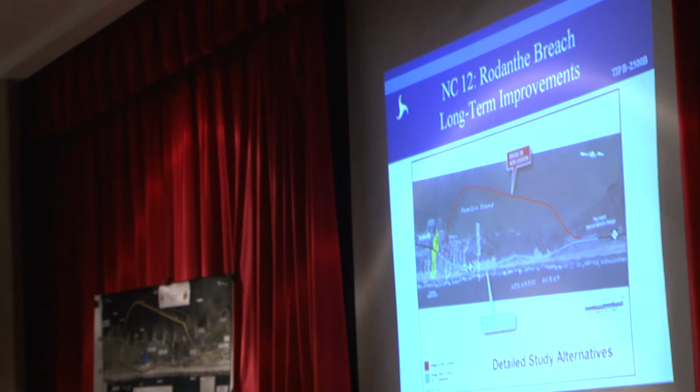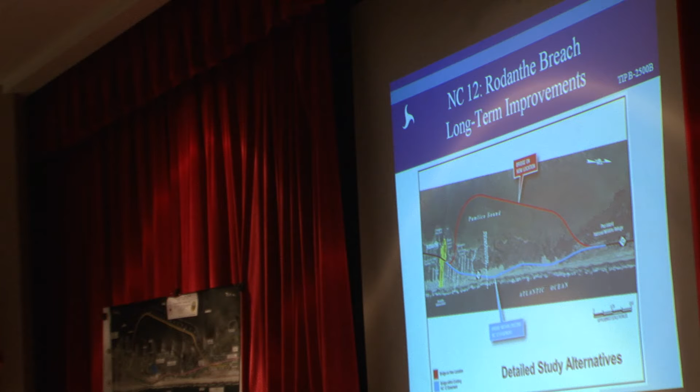As I mentioned, we're here for the Rodanthe breach portion of the Bonner Bridge project. This is phase 2B. Phase 1 is the Bonner Bridge itself. Phase 2A is the Pea Island breach area near the temporary bridge, and we had a hearing on that last year, March, springtime, early springtime period. Today we're going to talk about the breach area in the Rodanthe area.

I'm going to sort of follow through the order of your handout so you can follow along a little bit, but again, I'm not going to read it verbatim. I'll give you all a chance to do that at your leisure.

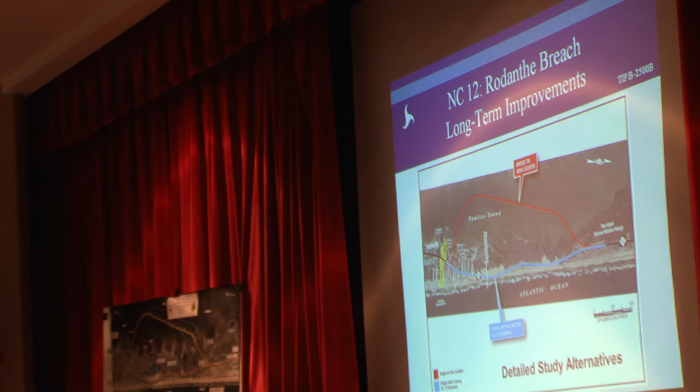As I mentioned earlier, we had informal open houses earlier today in Rodanthe. We had one yesterday in Ocracoke, and we'll have another one just prior to our formal hearing in Manteo. So if you'd like to come out for that, or if somebody misses it, send a neighbor or a friend. And then of course the formal presentation and formal hearing is tonight.

The same information is being presented at all of these meetings, so no one's hearing anything differently tonight than they heard yesterday, or will hear tomorrow. And for those folks who aren't comfortable coming up and speaking, everything carries the same weight. If you send me an email, however you get your comments to me, we look at all those equally. So don't feel like if you're not comfortable speaking that your voice is not going to be heard.

So the purpose of tonight's hearing is to receive your comments and concerns on this project. That's really why we're here. I'll talk for a few minutes, but really the important thing is to hear from you. DOT released an environmental assessment. That's a document.

That's an environmental study, a document that we just completed. In addition to comments on the project, we're asking for comments on that environmental assessment. It documents the studies we've done on the project and the decisions we've made up to this point.

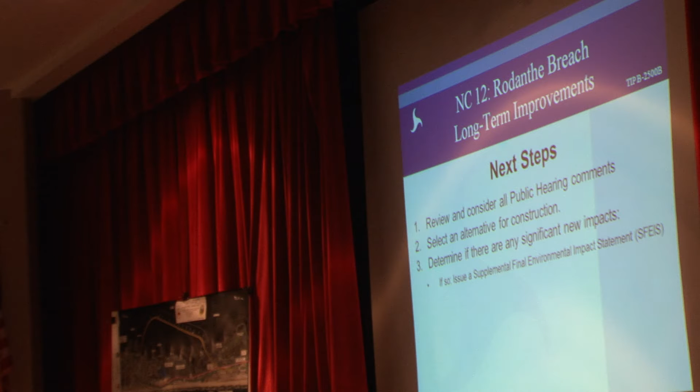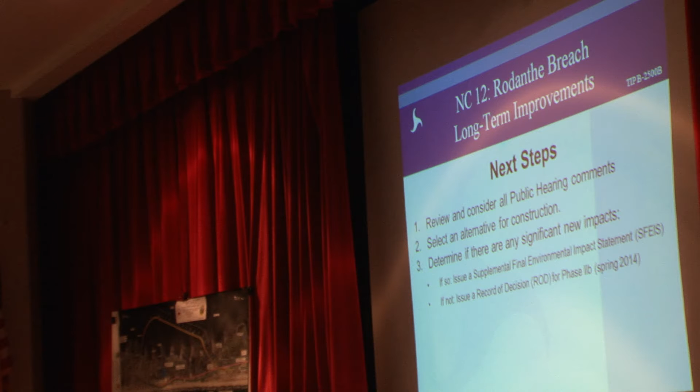If there are significant new impacts, then we'll do a supplemental final EIS—just another environmental document, another part of the studies that we do. If there are no new significant impacts, then we will issue a new record of decision for the project, and then we'll award a design build construction contract. Right now we're looking at late spring 2014.

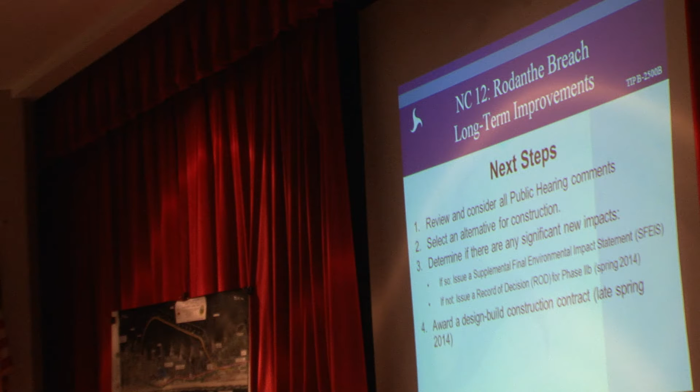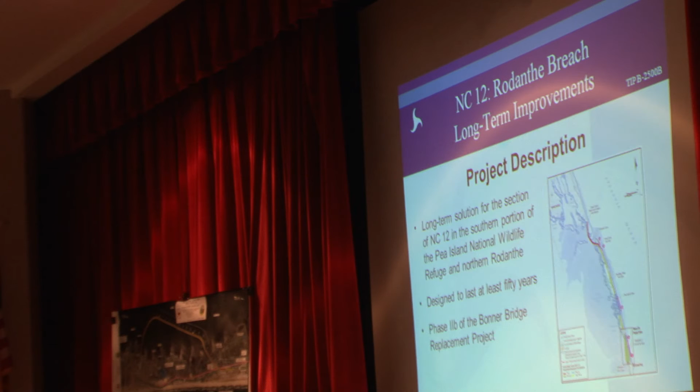So, a little bit about the project: it is the long-term solution for the section of NC 12 in the southern portion of the Pea Island National Wildlife Refuge and northern Rodanthe. It's designed to last at least 50 years, and as I mentioned earlier, it's phase 2B of the Bonner Bridge project. These are the two study alternatives that we have.

I'll cover some of the other options we looked at, but these are the two that went through detailed study. We have the bridge on new location, which starts north of Rodanthe in the Pea Island Wildlife Refuge and goes into the Sound and then ties in at Rodanthe. The other option is the bridge within the existing NC 12 easement, which generally follows the existing road.

It's within the existing easement—it won't be exactly where the road is, but generally will follow the existing road through and into Rodanthe. Both of these are bridges, so everything you see here is on a bridge: either a bridge along the existing easement, or a bridge in the Sound.

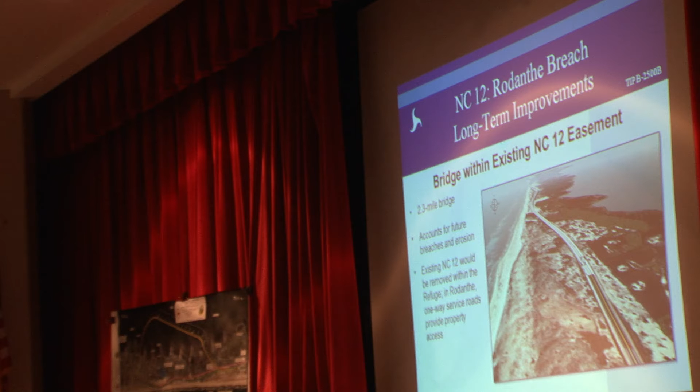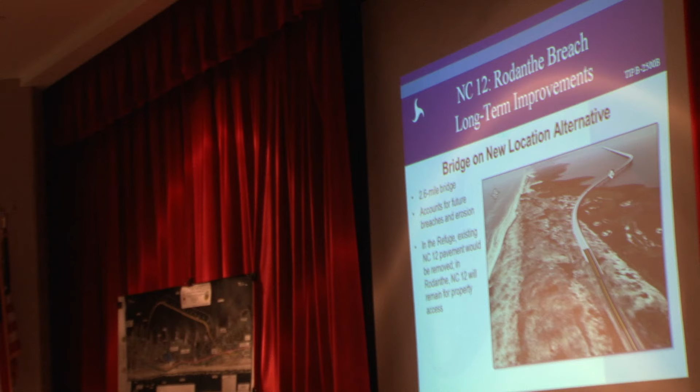With both alternatives, in Rodanthe NC 12 will remain for property access. So the portions of the road in Rodanthe will stay to access the properties, and then once you get into the refuge, all of that will be removed up to the new bridge. And again, we'll maintain traffic during construction.

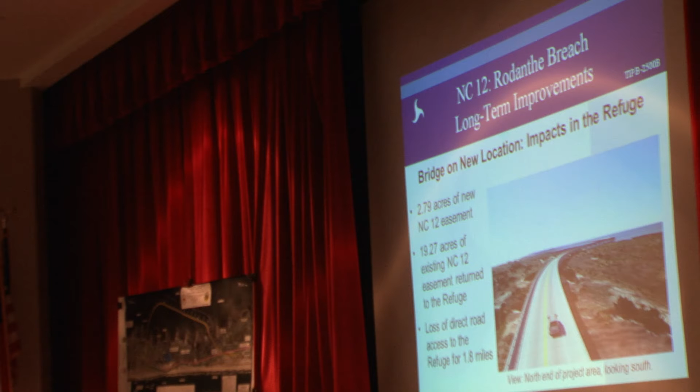Impacts in the refuge would be 2.79 acres of new easement needed, and 19.27 acres of existing NC-12 easement would be returned to the refuge. So there's sort of a net gain for the refuge with this alternative. And then loss of direct road access to the refuge for 1.8 miles—we wouldn't have the road through that area anymore, as I mentioned earlier.

Now, the preferred alternative, DOT's preferred alternative, is the bridge within existing NC-12 easement. Again, that's DOT's preferred alternative, but we want to hear from you today what your opinion is. Some of the reasoning behind that is that there's no new permanent NC-12 easement in the refuge—NC DOT already has that easement. It also avoids impacts to Pamlico Sound.

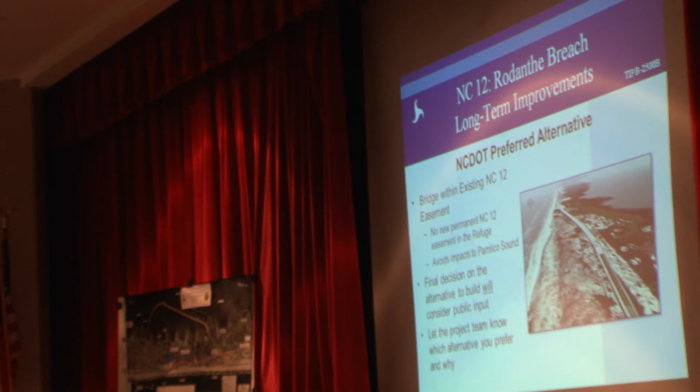But the final decision on the alternative will consider public input. So we really, really want to hear from you and your neighbors and anybody else that's not here that has an opinion. We want to hear from everyone. So let the project team know which alternative you prefer and why—the why is very important as well.

A little bit about project costs, funding, and schedule. Based on our preliminary design, construction costs for the bridge within existing NC-12 easement are between $187.5 million and $215.5 million. The bridge on new location is between $203.3 million and $236.3 million. These values include construction, right-of-way acquisition, and utility relocation, and are presented as a range to reflect possible structure types and construction techniques, giving our contractors some options to help maximize what we're able to do.

As far as funding, there will be state and federal funding, generally an 80-20 split—20% state funds, 80% federal funds. However, this may be eligible for reimbursement under federal emergency relief funding, and that could be as much as 30% of the long-term solution.

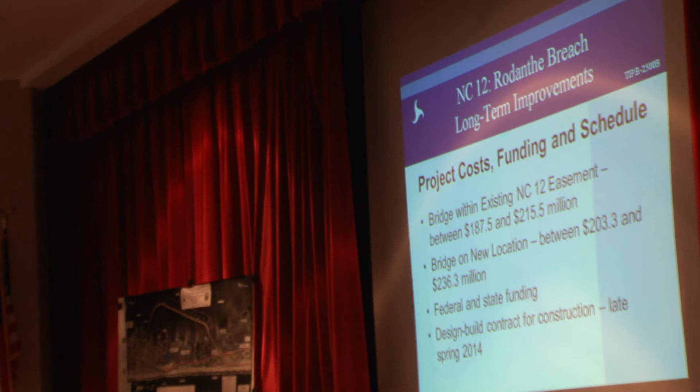As far as the schedule, we'll be looking at a design-build contract for construction in late spring 2014. Design-build means we'd have a contractor that would do the design and construction together to help maximize flexibility. But it does mean that when we let the project, they start the final design and also start purchasing right-of-way and those types of things. So it could be as much as a year and a half before you see actual construction—but they're not doing nothing, they're working on the final design and buying the right-of-way for the project.

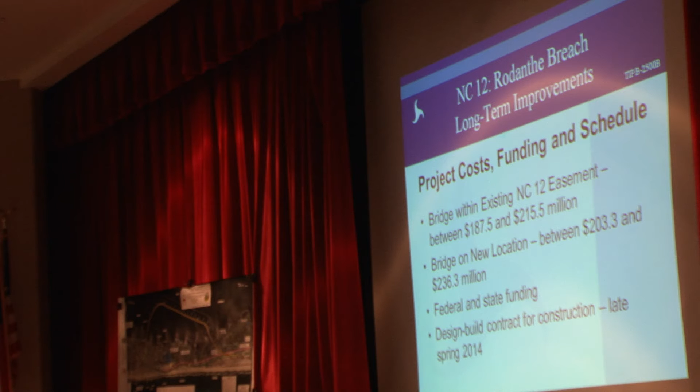Before we get to right-of-way acquisition, I wanted to note that on page 11 the purpose and need for the project is listed, for the Bonner Bridge replacement project, since this is part of the overall Bonner Bridge replacement project. This project is also consistent with local land use plans, mentioned on page 12.

There will be right-of-way acquisition for the project. It will require property acquisition and relocation of homes and businesses. On page 12, because there are relocations, I'm going to read through this. After decisions are made regarding the final design of the alternative selected for construction, the proposed right-of-way limits will be staked on the ground.

If you're an affected property owner, a right-of-way agent will contact you and arrange a meeting. The agent will explain the plans and advise you how the project will affect you, and will inform you of your rights as a property owner. If permanent right-of-way is required, professionals familiar with real estate values will evaluate or appraise your property.

The evaluations or appraisals will be reviewed for completeness and accuracy, and then the right-of-way agent will make a written offer to you. The current market value of the property at its highest and best use, when appraised, will be offered as compensation. NCDOT must treat all owners and tenants equally, fully explain owners' rights, pay just compensation in exchange for property rights, and furnish relocation advisory assistance.

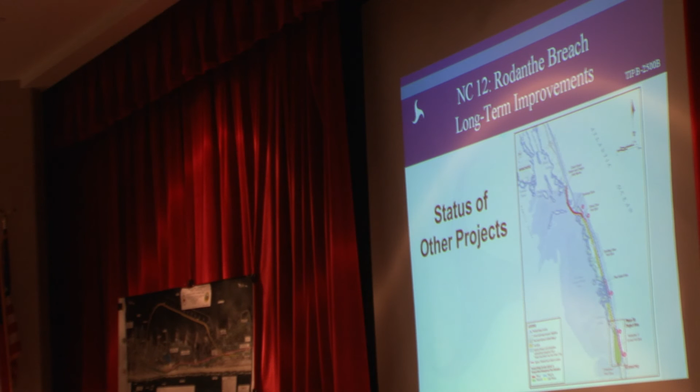Also, if you want more information—we've talked about this before—the NC12 site is here, and there are several other Twitter, Facebook, and other social media access points shown at the bottom of page 13. There are many ways to comment, but the key thing is we want to hear your comments.

I also mentioned, since we're near the end of the handout, there's a Title VI public involvement form. That's a voluntary form—you don't have to put your name down, but it will help us with our compliance, registering compliance with Title VI of the Civil Rights Act. So please take a moment to fill that out before you leave today, even if you don't finish your comments tonight. Again, it's voluntary, and we do not ask for your name.

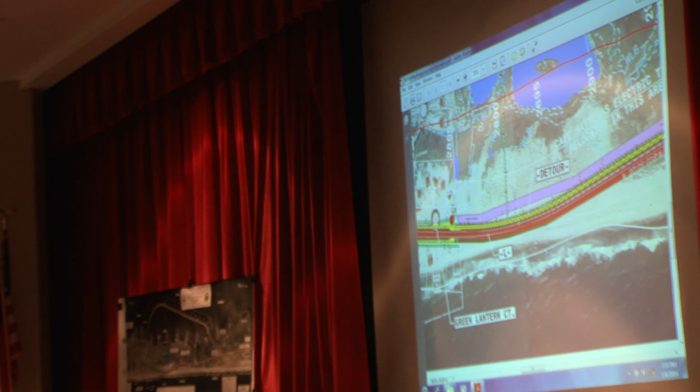And then what you'll notice is, in addition to the red bridge, there's yellow road. The yellow is the new pavement, new asphalt. What you'll notice on each side is that temporary road becomes two service roads, a one-way service road in each direction on either side of the bridge.

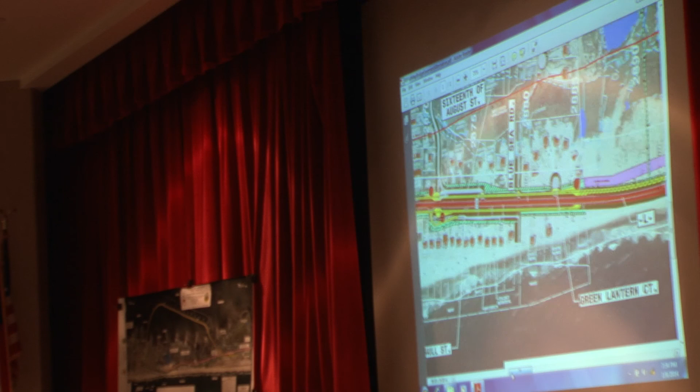And here you'll see a turnaround. That allows you to turn around, because everything that's hatched will be removed after construction is over—so all that road will be removed once construction is complete. Then here at Cross of Honor, there's another area to turn around. You can go under the bridge in both of those locations to turn around, since you just have one-way access on each of those roads.

So how do you get on those roads? Right here—this is where the bridge comes back. There will be 17.5 feet of clearance underneath the bridge from the land, so cars and trucks can get under it in those turnarounds. At this point the bridge comes back down and lands, hitting existing ground, and then you have an intersection right here that gives you access to those service roads. That's generally the end of that option.

Okay, so that's a brief overview of that one, and we'll run through the new location alternative as well. All right, look away for a moment, I'm going to whip by—anybody getting dizzy? Okay, here we go. This is the beginning of the new location option.

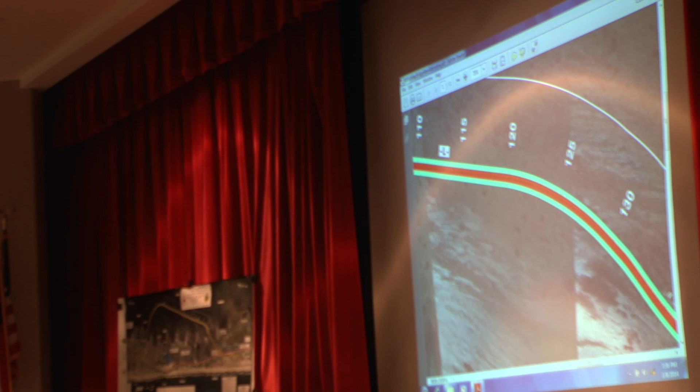You see the bridge begins and starts to turn. It starts at existing ground and then goes up into the air and continues along—this one's a little harder because it doesn't go straight, but it continues out into the sound. You're not going to really see a whole lot until we get to the other end, so let's zip over here to the other side.

Into Rodanthe, where it curves back around and comes back and lands just south of America Drive, and you have another intersection. Everything you see in yellow is new pavement, and everything hatched is pavement that's removed. So what you'll end up with is this is an access road—this part, which at that point was NC12, becomes an access road for the properties in that area, and NC12 will continue south.

So going back over here to give you an idea of what's going on in these neighborhoods with existing NC12, you can see the yellow there—that's the end of the road, a little T-turnaround where you can turn around, but it'll be sort of a dead end there. The gray hatching is pavement that's going to be removed. So as we mentioned earlier, with this particular option, all the pavement on existing NC12 would be removed.